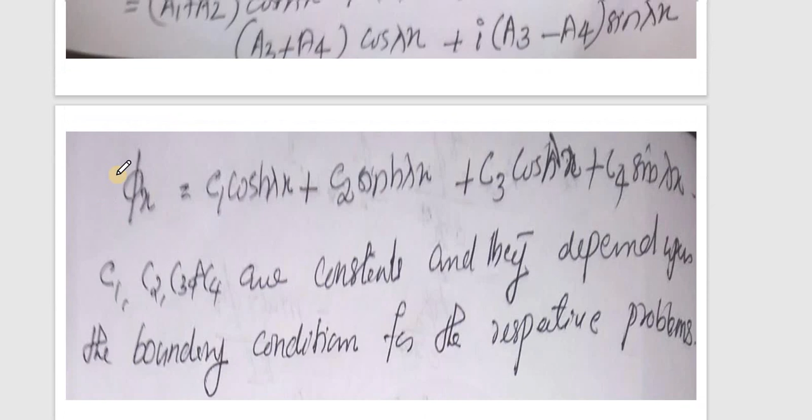So students, in the last class we have studied how to calculate the solution for the differential equation of a distributed system. Now let us look into the first case, that is the simply supported beam. So this is a simply supported beam. From this solution only we will be starting how to solve it.

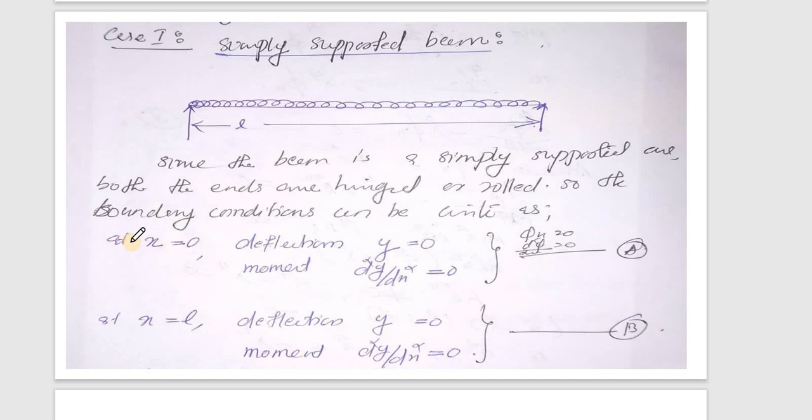Now we know that for a simply supported beam, the boundary condition at x is equal to 0: what will be the deflection? Deflection will be 0, moment is also 0. Then at x is equal to L, the deflection is 0 and moment is also 0. Here the deflection is represented as y.

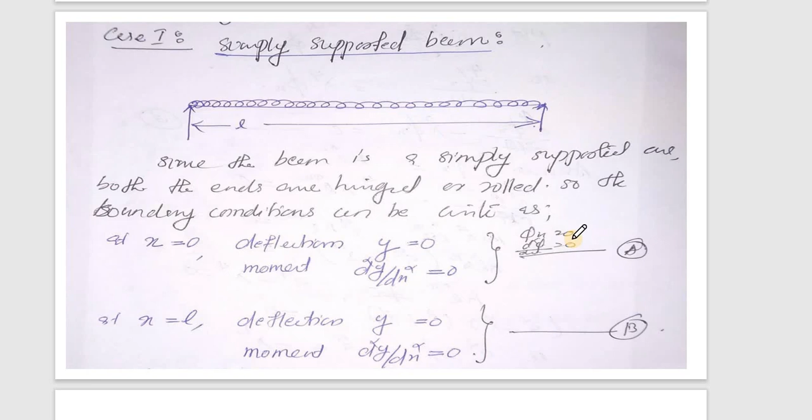Instead of y we are having phi of x, and the moment is d square phi by dx square. So these are the two boundary conditions we are having. At one end we are having two boundary conditions, and at the other end also we are having two boundary conditions.

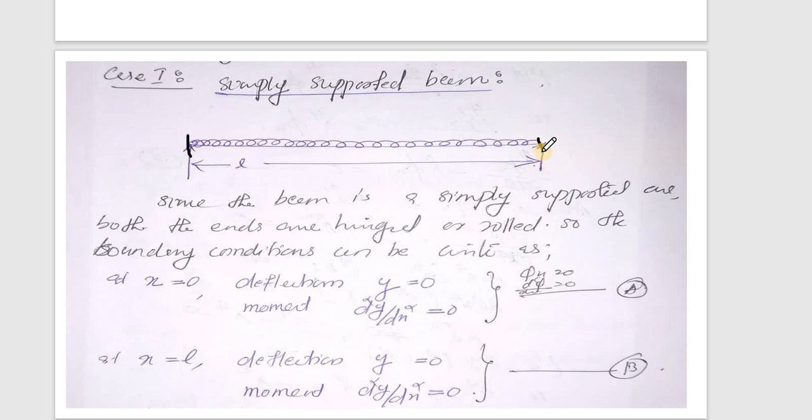Now we know that this is the solution: phi of x is equal to c1 cosh lambda x plus c2 sinh lambda x plus c3 cos lambda x plus c4 sin lambda x. Here both are hyperbolic functions, and here they are normal functions, normal angles. Now applying the first boundary condition, at x is equal to 0, phi of x is equal to 0.

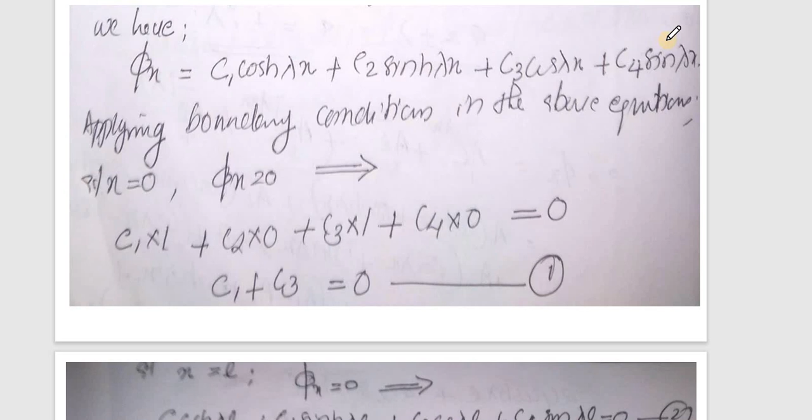At x is equal to 0, what is cos 0? Cos 0 is 1. So c1 into 1 plus c2 into 0, this term will be 0. Here it will also be 1, and this will again be 0. Therefore c1 plus c3 is equal to 0. Now at x is equal to L we have another equation: c1 cosh lambda L plus c2 sinh lambda L plus c3 cos lambda L is equal to 0. Let it be equation number 2.

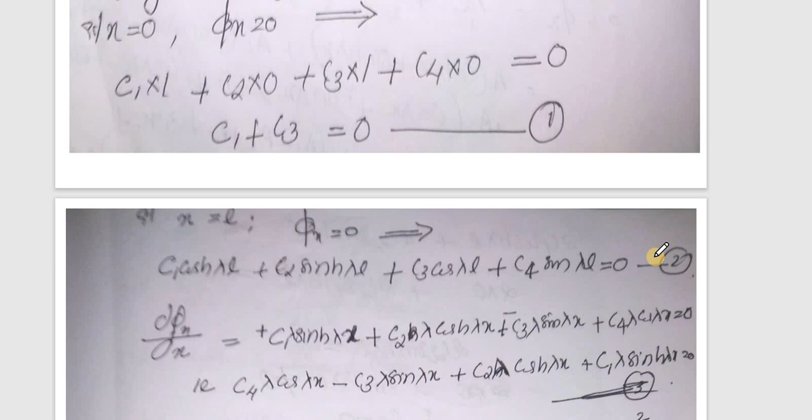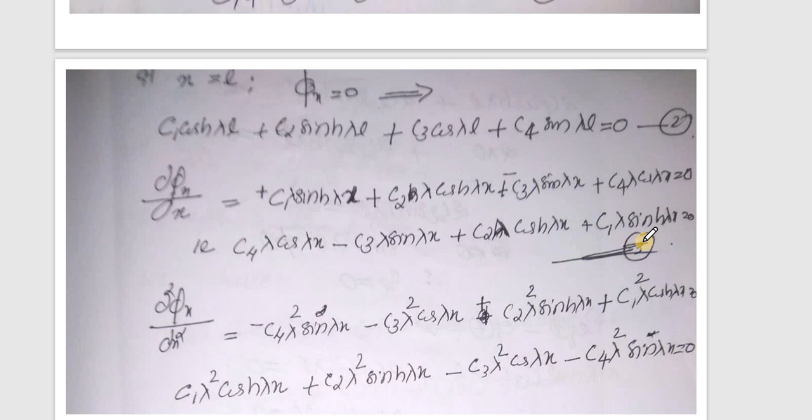Now we are having two more boundary conditions, that is d square phi by dx square. So first of all we find d phi by dx. I am differentiating, then again one more differential is taken, so I will be getting d square phi by dx square is equal to c1 lambda square cosh lambda x plus c2 lambda square, like that a long equation. Now I am going to apply it.

At x is equal to 0, d square phi by dx square is equal to 0. So again this term will be 1, sin 0 is 0, and I will be getting c1 lambda square minus c3 lambda square is equal to 0. I can take lambda square as a constant, and lambda square cannot be 0. Therefore c1 minus c3 is equal to 0, or c1 is equal to c3. This is my equation, c1 is equal to c3.

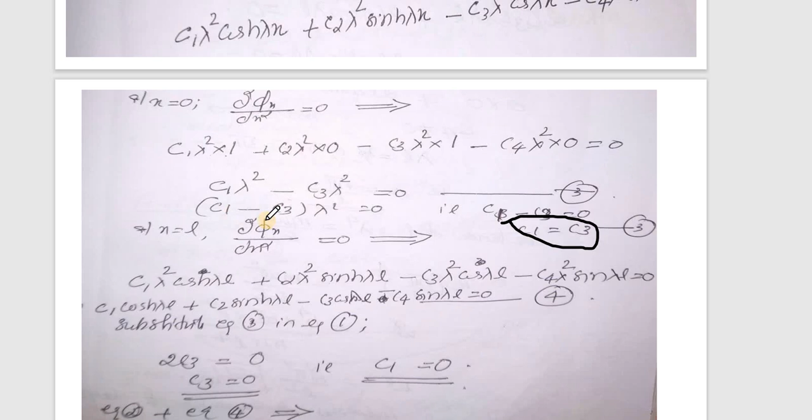Now I have the next boundary condition. At x is equal to L, again d square phi by dx square is equal to 0. So substituting again, instead of c1 I am substituting c3. I will be getting 2c3 is equal to 0, that is substituting 3 in equation 1. So this is equation number 3, and this term which I got is the fourth one.

Now I am substituting 3 in 1. This is my equation 3, and equation number 1 is c1 plus c3 is equal to 0. So I have got 2c3 is equal to 0, or c3 is equal to 0 and c1 is equal to 0. So two terms I have eliminated.

Now I am adding equation 2 plus 4. This is equation number 2, and equation number 4 is this one. Adding them, I will be getting 2c1 cosh lambda L plus 2c2 sinh lambda L is equal to 0. But c1 is 0. So 2c2 sinh lambda L is equal to 0; sinh lambda L cannot be 0, only c2 can be 0. Therefore c1, c3 and c2, these three terms are 0.

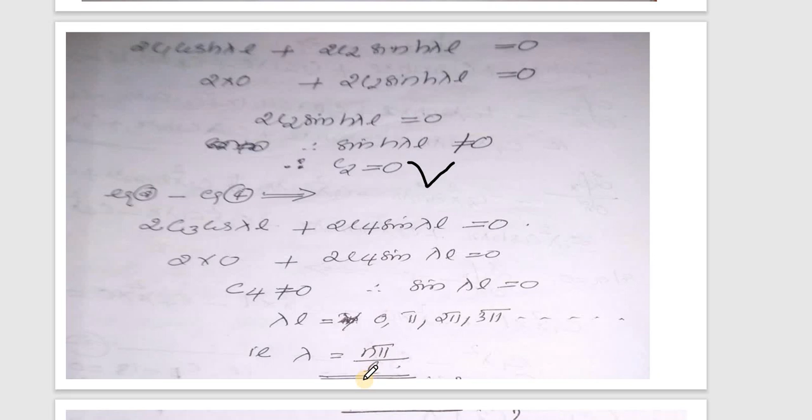So the only term that can become 0 is sin lambda L. But sin lambda L is 0 means, when is sin theta 0? When it is 0, pi, 2 pi, 3 pi. So from this I can write, therefore lambda L is equal to 0, pi, 2 pi, 3 pi. So lambda is equal to n pi by L. N can be 0, 1, 2, 3 like that.

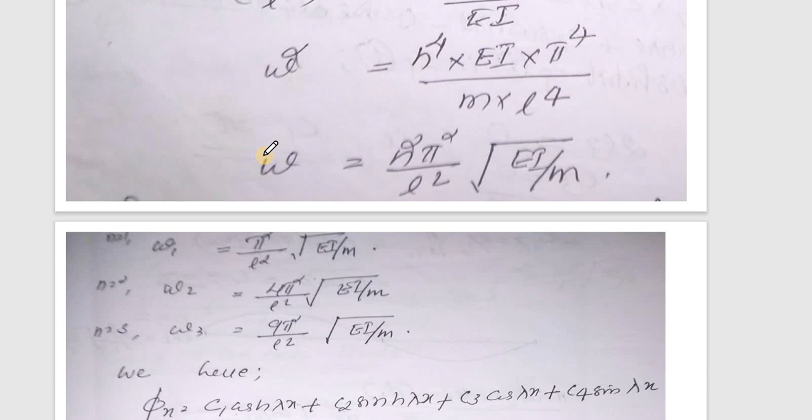So we got lambda. But we know that lambda raised to 4 is equal to m into omega square by EI. This is a term which we read in the first part of the class. But lambda we got n pi by L. So n pi by L raised to 4 is equal to m into omega square divided by EI. From that, omega is the frequency. So I can take omega is equal to n square pi square by L square into root of EI by m. This is the equation of natural frequency.

Now when n is equal to 1, what will be the natural frequency? First natural frequency will be pi square by L square into root of EI by m. When n is equal to 2, it will be n square, so 2 into 2, 4 pi square, then 9. So like that I can find out each of the natural frequencies. So that is the term written here. You can see natural frequency. Omega is equal to n square pi square by L square root of EI by m. So these are the natural frequencies.

Okay. Now we have to find out the mode shapes, how the mode shape will be. So now we have phi of x; from this, C1 is 0, C2 is 0 and C3 is also 0. The only term is C4 sin lambda x. So phi of x is equal to C4 sin lambda x. What is lambda? N pi by L. So phi of x is equal to C4 sin n pi x by L.

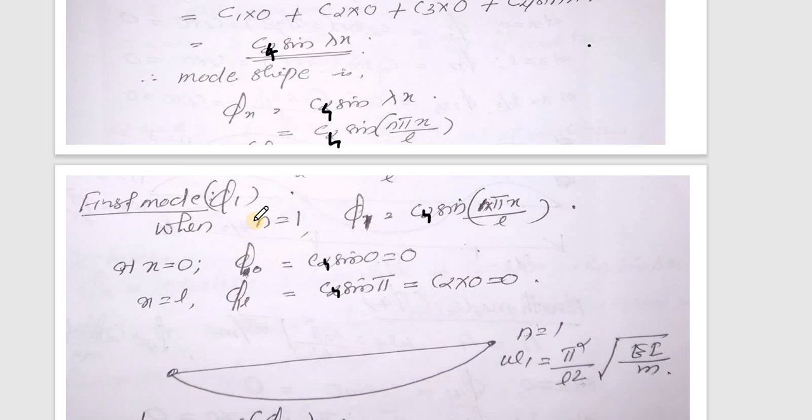Now let us take the first mode shape. That is when n is equal to 1, phi is equal to C4 sin pi x by L. So at x is equal to 0, phi of x is equal to 0. At x is equal to L, again it is 0. So at both the ends it is 0. Therefore this will be my first mode shape. Now by seeing the next 3 mode shapes, you will understand why it is written like this.

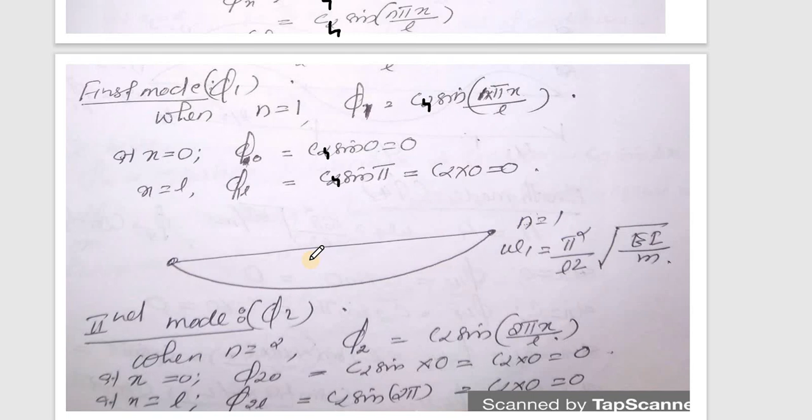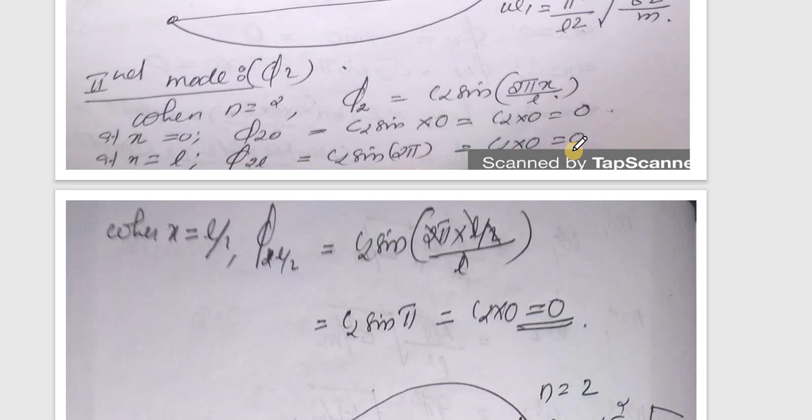For the second mode shape, n is equal to 2. A small note: in the notes C2 is written, but this is C4 only, that you need to understand. So when n is equal to 2, phi 2 is equal to sin 2 pi x by L. At x is equal to 0, phi is equal to 0. At x is equal to L, it is 0. Then at x is equal to L by 2, that is also 0, sin pi is 0. Therefore the second mode shape will be like this, with a node at x is equal to L by 2.

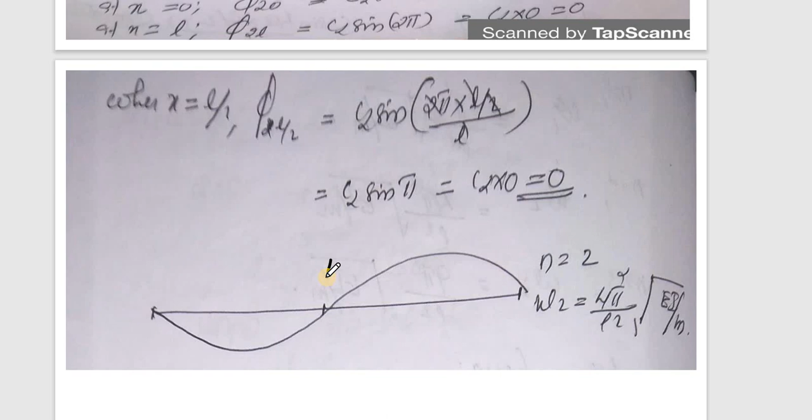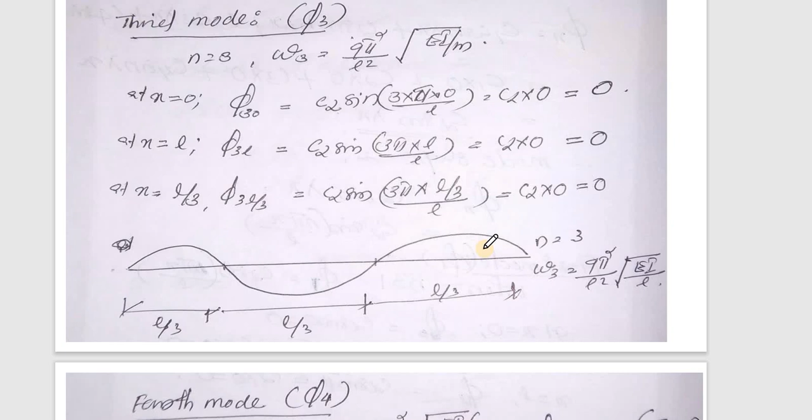Now the fourth mode shape will be like this. At x is equal to 0, it is 0. At x is equal to L, again phi of x is equal to 0. At x is equal to L by 4, again 0. At x is equal to L by 2, how is it coming? Sin pi is equal to 0, sin 2 pi is again 0. That is sin 180 and sin 360, everything will be 0. So likewise I can find out the mode shapes.

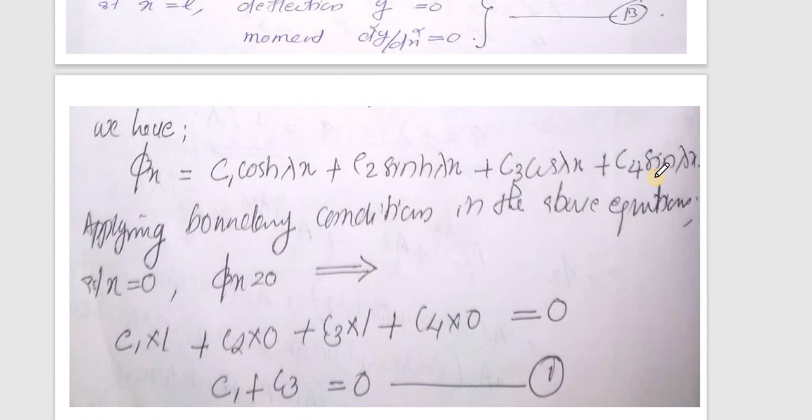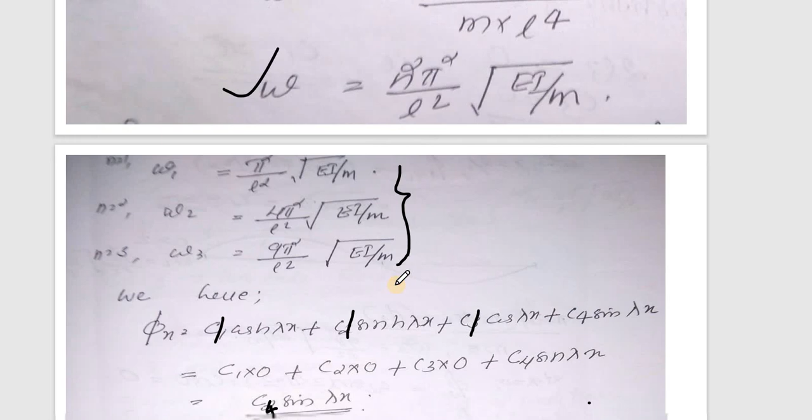Okay. So where did we start this? We started from this equation. If you know this equation, from this you can just write and find out. First you have to find out the natural frequency. These are the natural frequencies of different modes, and these are the mode shapes. Only by writing will you be able to understand it. Compared to some of the topics in the third and fourth modules, this is very easy, because we just need to find the solutions by substituting the standard equation.